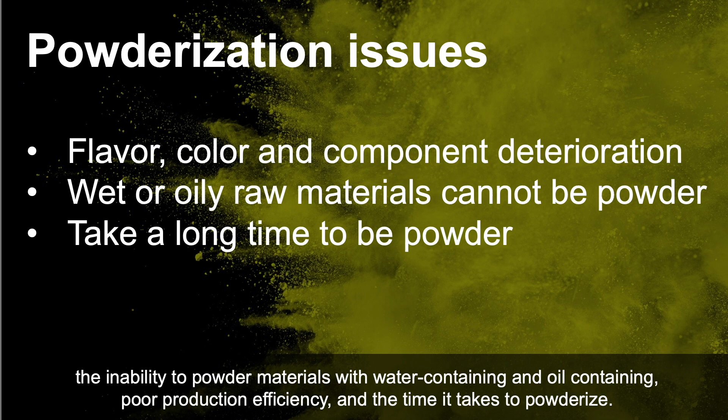However, various problems happen in powdering the material. There were problems such as the deterioration of flavor, color, and ingredients, the inability to powder materials containing water and oil, poor production efficiency, and the time it takes to powderize. Powder Bank Japan solves these problems through 3 businesses: machine manufacturing and sales, powder development support, and powder sales support.

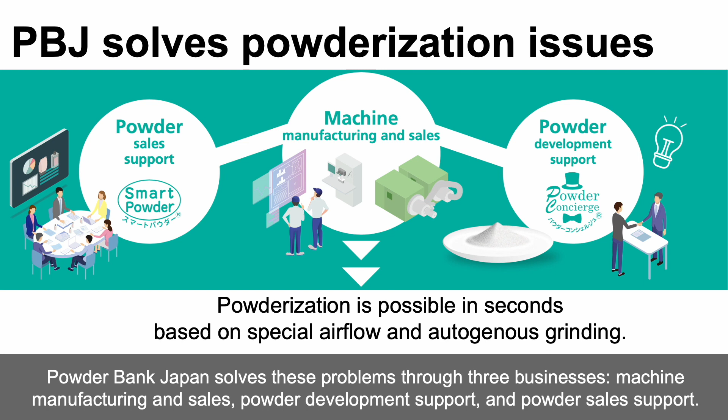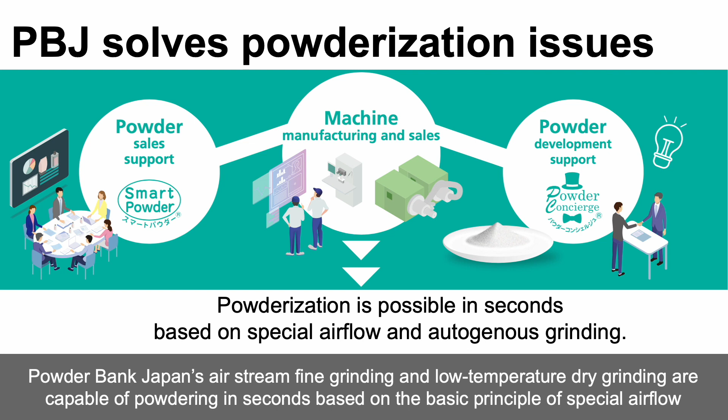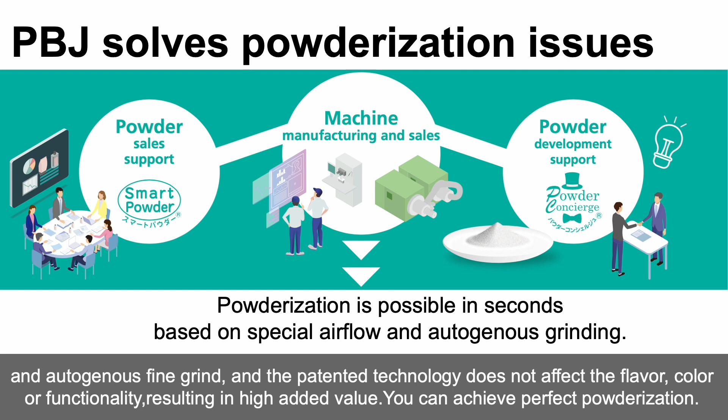Powder Bank Japan's airstream fine grinding and low-temperature dry grinding are capable of powdering in seconds based on the basic principle of special airflow and autogenous fine grinding, and the patented technology does not affect the flavor, color, or functionality, resulting in high added value. You can achieve perfect powderization. I would like to introduce 2 grinding machines that can achieve these goals.

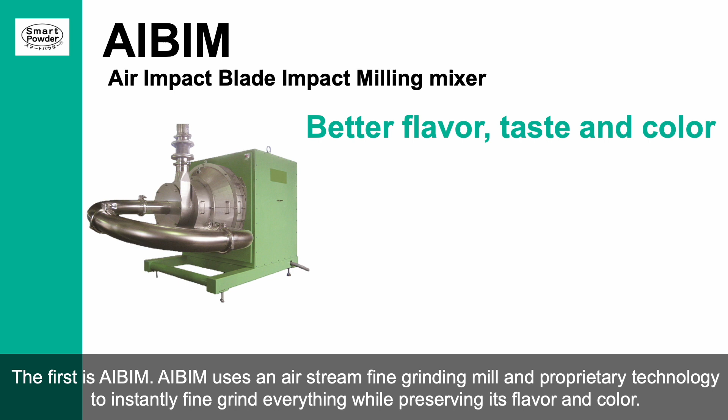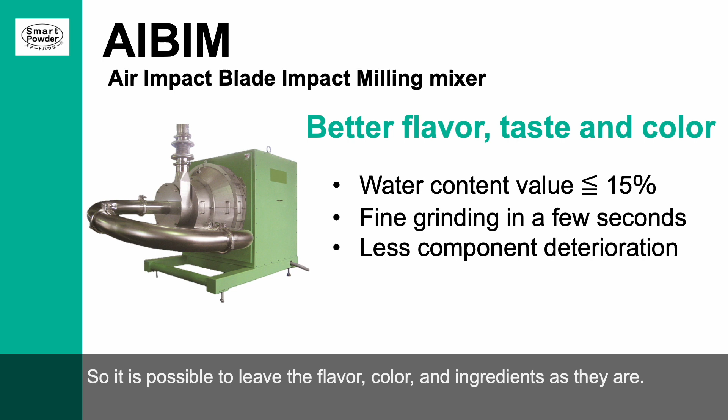The first is AIBIM. AIBIM uses an airstream fine grinding mill and proprietary technology to instantly fine grind everything while preserving its flavor and color. Raw materials with a water content value of 15% or less are finely ground in a second, and the quality of the raw materials is less deteriorated by heat. So it is possible to leave the flavor, color, and ingredients as they are.

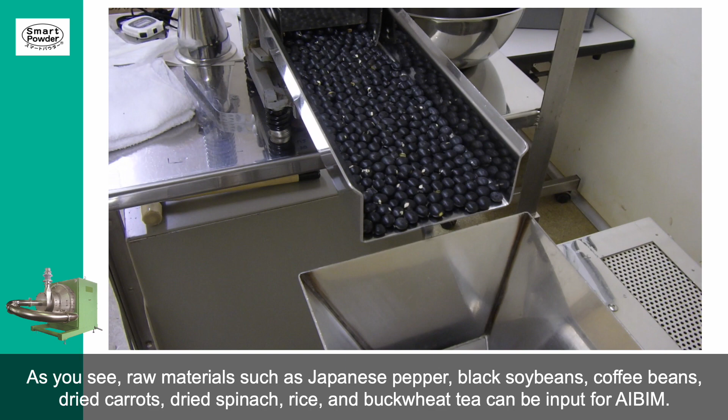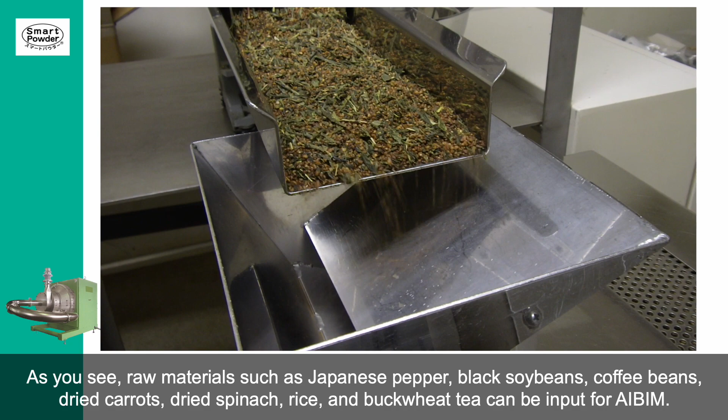As you see, raw materials such as Japanese pepper, black soybeans, coffee beans, dried carrots, dried spinach, rice, and buckwheat tea can be input for AIBIM. After the material is added, it is powderized in a second, and the temperature rise is small, making it ideal for fine grinding heat-sensitive materials. As you can see, the color of buckwheat tea is kept as it is, and we can make a functional powder with good flavor and rich nutrition.

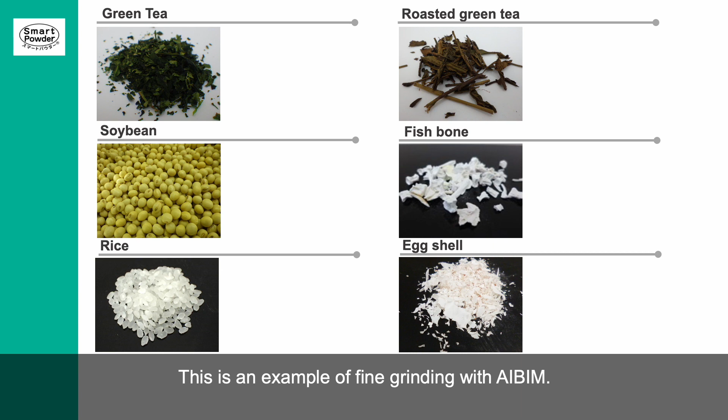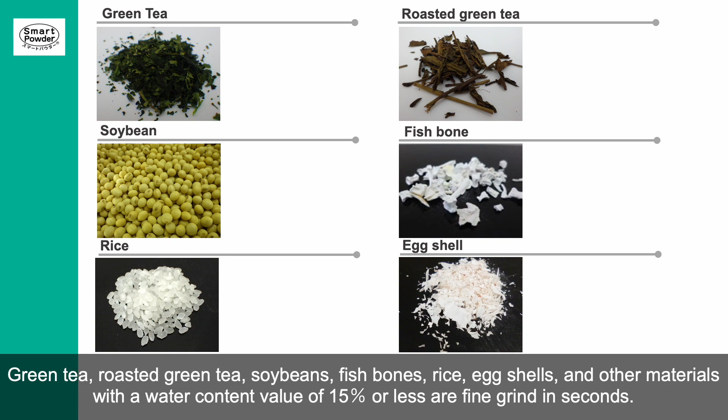This is an example of fine grinding with AIBIM. Green tea, roasted green tea, soybeans, fish bones, rice, eggshells, and other materials with a water content value of 15% or less are finely ground in seconds. We can also leave the flavor, color, and ingredients as they are. Even raw materials containing oil such as soybeans can be finely ground with AIBIM.

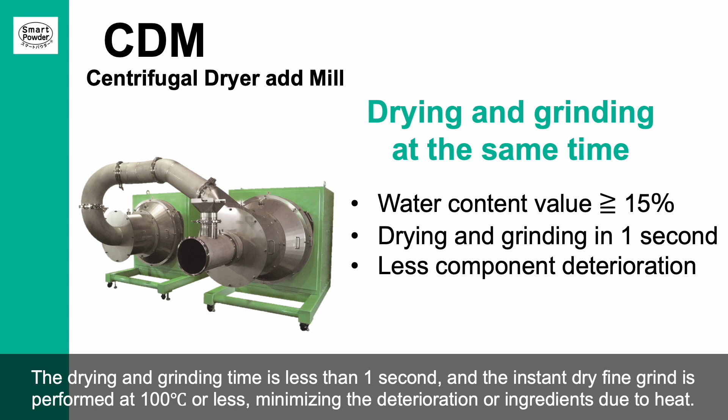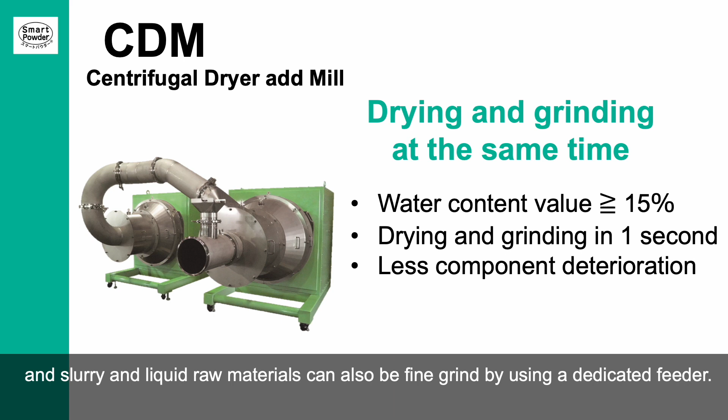The second is CDM. It is a machine that powderizes instantly from drying to fine grinding. The drying and grinding time is less than 1 second, and the instant dry fine grinding is performed at 100℃ or less, minimizing the deterioration of ingredients due to heat. Like AIBIM, it can powder while maintaining flavor, color, and nutrition. In addition, cut solid raw materials can be fed as they are, and slurry and liquid raw materials can also be finely ground by using a dedicated feeder.

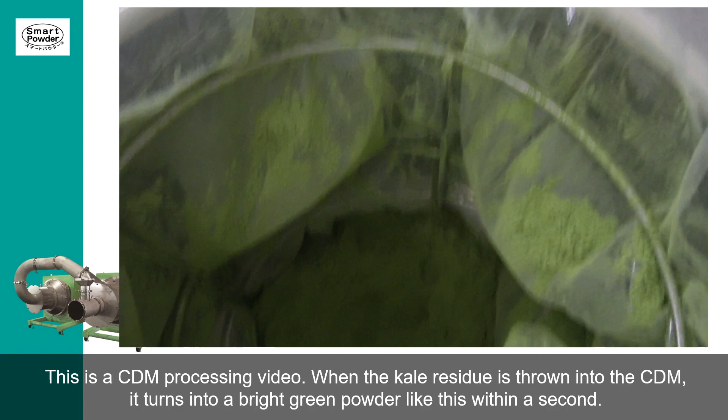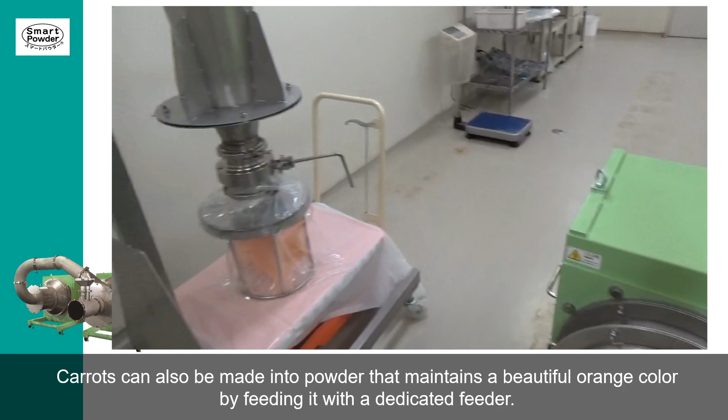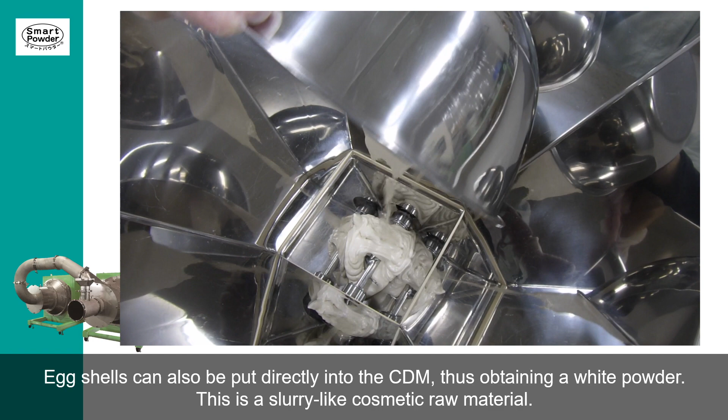This is a CDM processing video. When the kale residue is thrown into the CDM, it turns into a bright green powder like this within a second. Carrots can also be made into powder that maintains a beautiful orange color by feeding them with a dedicated feeder. Eggshells can also be put directly into the CDM, thus obtaining a white powder. This is a slurry-like cosmetic raw material. Even if the raw material is in a slurry state, if it is put into the CDM in this way, a white powder can be obtained.

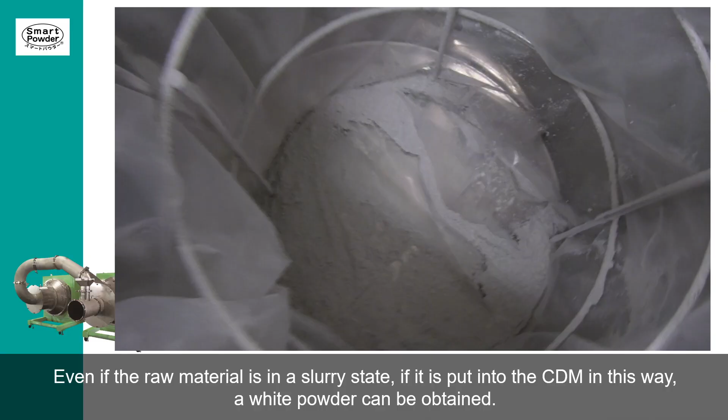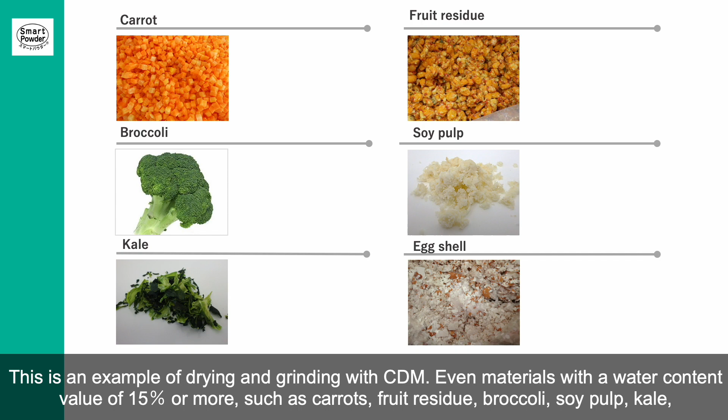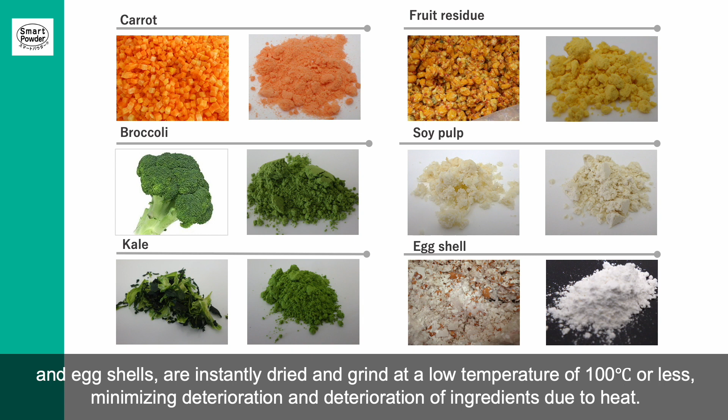This is an example of drying and grinding with CDM. Even materials with a water content value of 15% or more, such as carrots, fruit residue, broccoli, soy pulp, kale, and eggshells, are instantly dried and ground at a low temperature of 100℃ or less, minimizing deterioration of ingredients due to heat. It can be powdered while maintaining flavor, color and nutrition. Liquid and slurry raw materials can also be powdered in an instant.

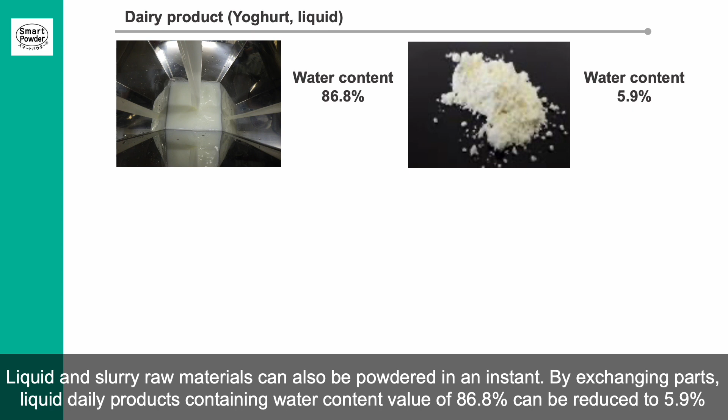By exchanging parts, liquid dairy products with a water content value of 86.8% can be reduced to 5.9% and powdered. Similarly, slurry cosmetics with a water content value of 44% can also be powdered. We have succeeded in drying and grinding to a water content value of 0.7% from slurry-like raw materials, which have been difficult to feed stably.

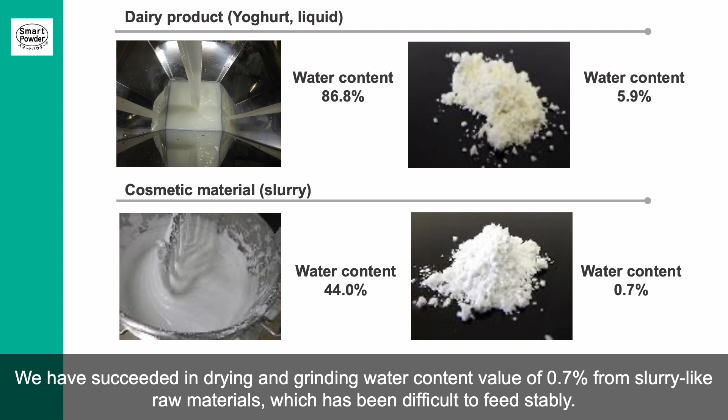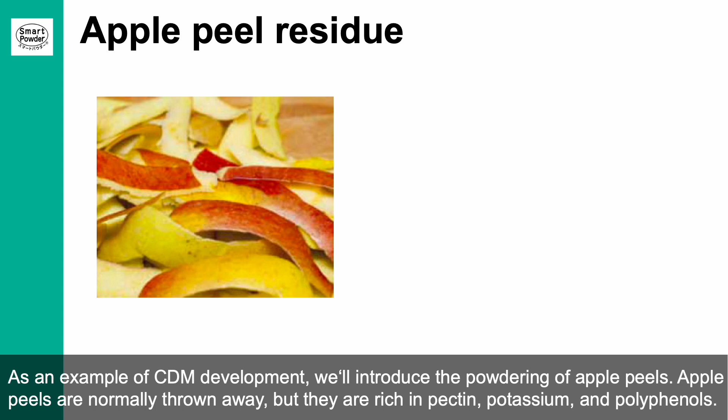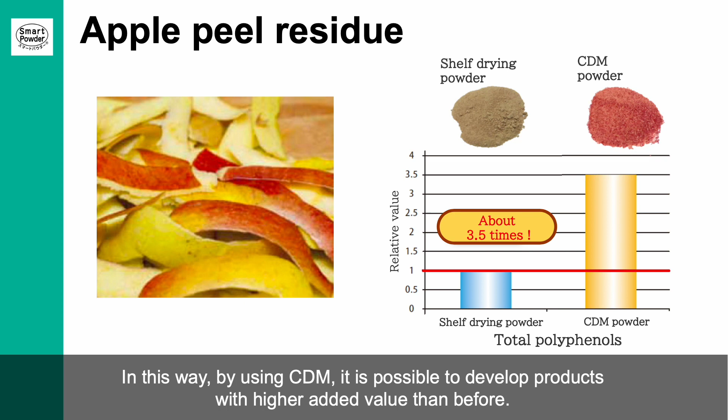As an example of CDM development, we will introduce the powdering of apple peels. Apple peels are normally thrown away, but they are rich in pectin, potassium, and polyphenols. When we dried and ground such materials that would otherwise be discarded using CDM, we found that, compared to conventional shelf-drying products, the red color of the apple peel was preserved, and it contained 3.5 times more polyphenols. In this way, by using CDM, it is possible to develop products with higher added value than before.

Powder Bank Japan also provides powder sales and powder development support. In sales support, we use the trademark of Smart Powder to differentiate our products, improve quality and functionality, secure channels to the food and health food industries, and provide support for brand establishment through services such as overseas sales collaboration.

In powder development support, we provide various development support, from powder planning to technical support, manufacturing flow construction, extraction, and fermentation technology, based on the knowledge of over 4,000 processing and trial production runs on more than 1,000 types of materials.